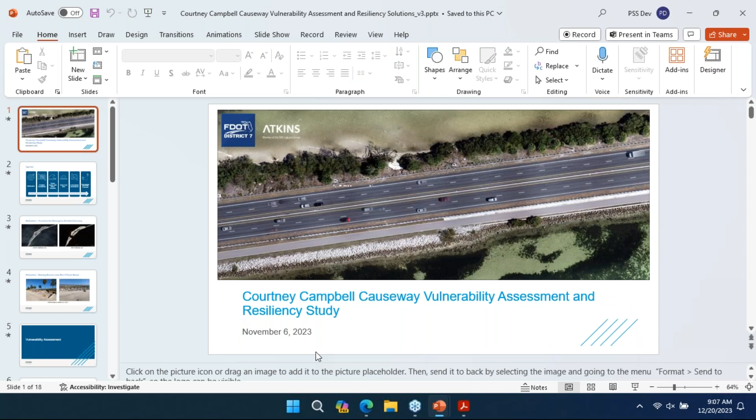Good morning everyone. I'm Mike Salisbury, a coastal engineer with Atkins here on behalf of FDOT to give a presentation on the study we're doing. This is a two-part presentation - I'll go first, then Tara will present after me. We're currently evaluating the existing conditions at Courtney Campbell Causeway and trying to understand how vulnerable it may be to certain storm events, meaning hurricane-type storms or major coastal storms that kick up waves and tides to levels that could possibly damage the causeway and bridges. My presentation will cover the motivation, existing conditions, storm surge and wave hazards the causeway can expect, and wrap up with conceptual alternatives we're considering and a path forward.

First, a little on the motivation. Most of you are probably familiar with Hurricane Ian from last year, which famously impacted the Sanibel Causeway. The picture on the left is the Sanibel Causeway before Hurricane Ian, and on the right is shortly after. You can see the causeway was completely cut through, the bridges and causeways torn apart. That was the only access route for folks living on Sanibel Island, which caused significant angst and problems for local residents.

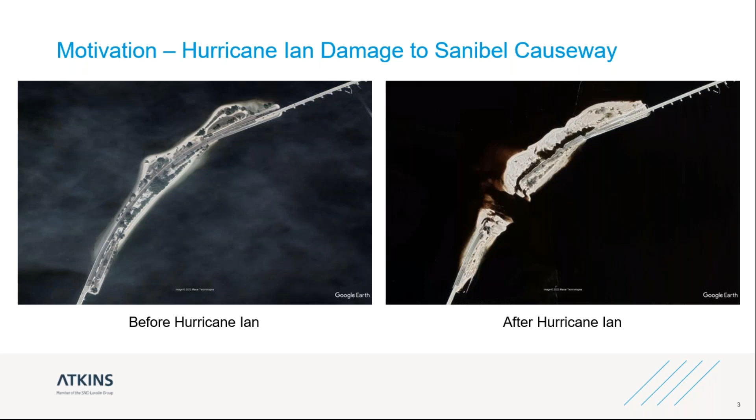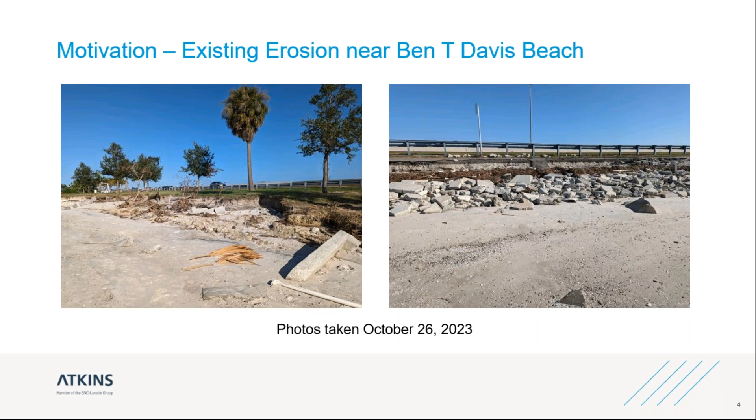So that leads us into trying to understand how vulnerable the causeway is. In order to do that, we did a few different things.

One is we did a field reconnaissance, so we went out there to the site. We took a drone with us, and we did a lot of drone imagery and mapping, took over 3,500 aerial images.

We visited some critical areas. We had to understand for the revetments that are out there, how they're built, how robust, and robustness has a lot to do with how big the rocks are. Think of big waves from storm events—those waves can pick up things and move them pretty easily. So you have to build rocks that are big enough, heavy enough that the waves won't pick them up and move them away when they start crashing into the shoreline.

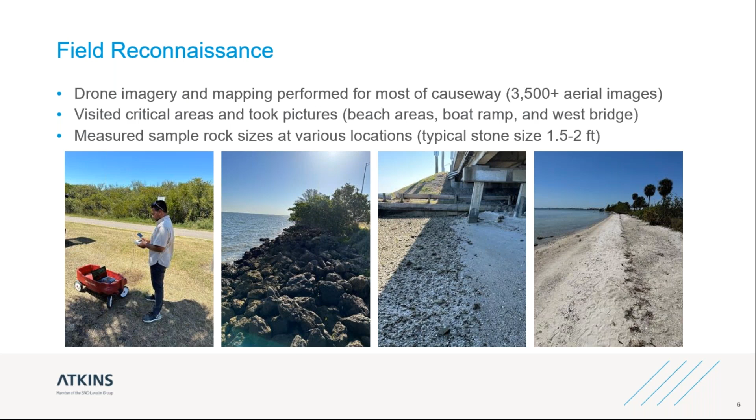So we need to understand what was existing out there. Once we got a handle on existing conditions, we needed to get our arms wrapped around what the potential extreme storm event conditions are that can impact the area—what are anticipated storm surge levels, what are anticipated waves that will be crashing into the shoreline.

There's a few different data sources we can use. The one we've found to be most comprehensive that we can lean on for our current effort is the Army Corps, U.S. Army Corps South Atlantic Coastal Study. Now, that's South Atlantic—it's a little bit of a misnomer since it also stretches to the Florida Gulf Coast, so it covers all the Tampa Bay area. It's a state-of-the-art modeling study they did, looking at thousands of potential storm events that can impact the area, and it was just released to the public in October 2022, so just a year old.

So we took that data and we wanted to understand, as it applies to the causeway, what that looks like in terms of what could impact the bridges. To use this figure on the screen here, I want you to envision that you're out in the middle of Old Tampa Bay in a boat.

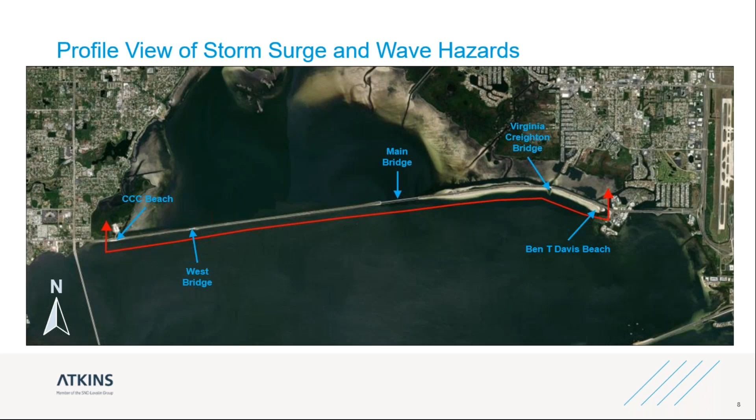You're on the south side of the causeway, looking north. You can see the Pinellas side, Courtney Campbell Beach side is on the left, and Ben T. Davis is all the way to the right. Just imagine you're in a boat looking horizontally towards the north, orienting you a little bit here. What you see here is the profile of the bridge from west to east between the two beaches. The black line is the edge of the roadway elevations as you go along the causeway.

Colors don't show up too well on the screen, but the orange color, in this case, is the 20-year storm surge elevation. When you hear someone say 20-year, 100-year, etc.—a 20-year storm surge has about a 5% chance of occurring in any given year. A 100-year storm would have a 1% chance of occurring in any given year.

So the 20-year storm surge level is right at the edge of the road, edge of the pavement, in a lot of locations. And when you factor in the waves on top of that, the wave crest elevation completely overtops the road. So the causeway becomes very vulnerable in just the 20-year conditions. Anything above and beyond that would just be more problematic.

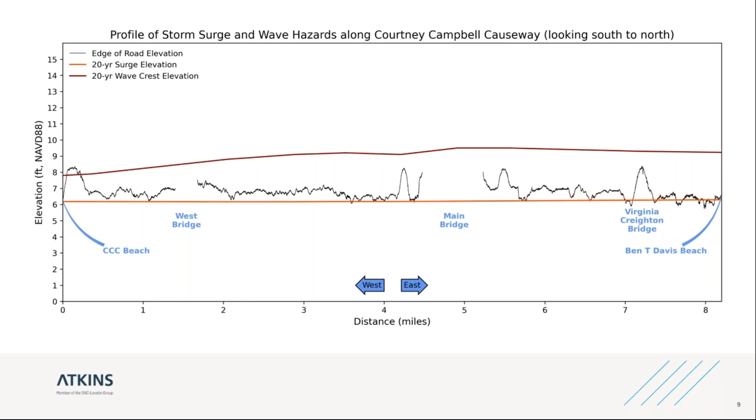So once we understood how vulnerable the bridge is now and into the future, the phase we're in now is starting to look at possible resiliency solutions. We're evaluating anything and everything that can be used along the causeway, from completely green solutions such as vegetative plantings, mangroves, marsh sills, all the way up to completely gray solutions such as stone revetment or seawalls. It really could be anything in between, combinations of green and gray infrastructure.

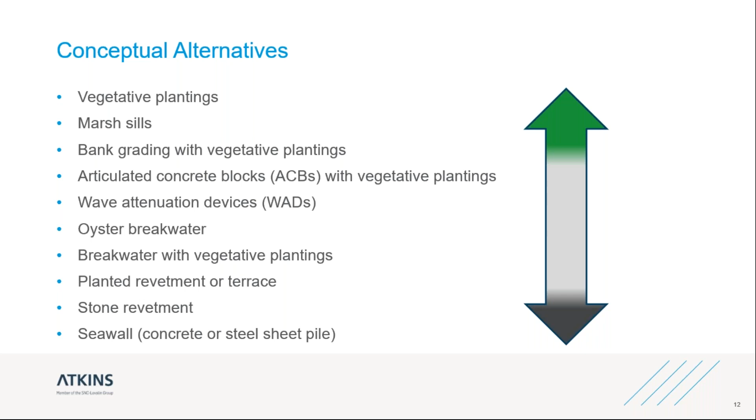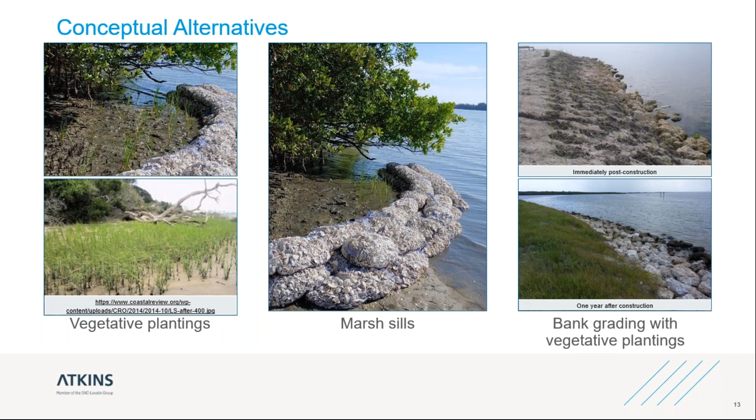Just to give you an example of what that looks like: vegetative plantings on the left, marsh sills in the middle, and bank grading with vegetative plantings on the right. Continuing on through various breakwater and wave attenuation devices, here are some examples of what they could possibly look like.

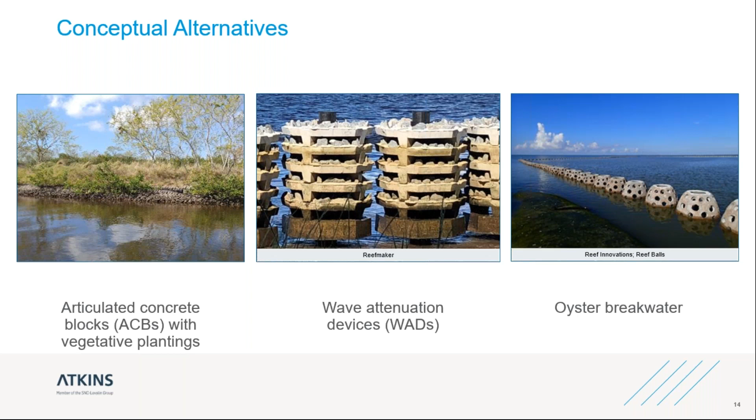And getting into a little bit more of the gray scenarios, with revetments and seawalls, which most people are pretty familiar with.

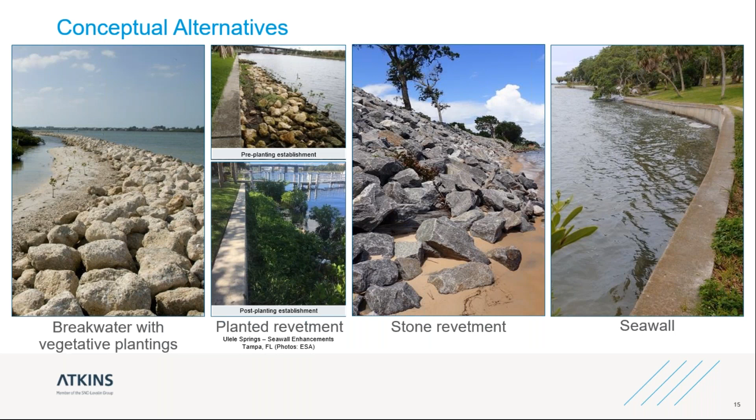So when we evaluate each of these options, we look at how robust they are at holding up to extreme water levels and waves impacting the shoreline, how easy it is to permit, how beneficial it is to the environment, and local conditions such as bathymetry and soil. It's a whole matrix where we evaluate pros and cons, and eventually we'll identify what we think is the ideal solution for the causeway.

More than likely, based on what we see, it's probably going to be a combination of solutions. In one area, one solution makes the most sense. The causeway is about 9 miles long, give or take, so moving to a different location, given local conditions, maybe a different solution makes sense. So we'll probably end up with a hybrid of scenarios.

Once we understand what each of those solutions are, the plan is to present to FDOT leadership for consideration and discussion on moving forward.

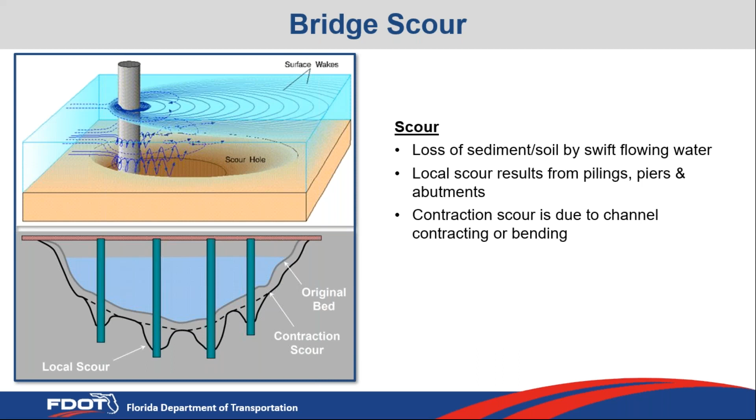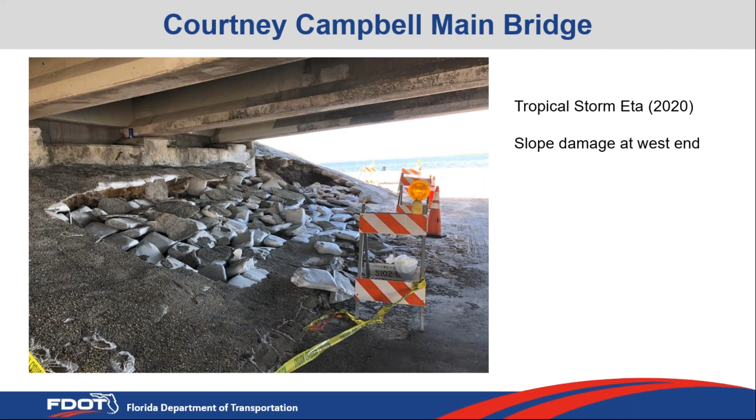This was an old design we had for slope protection: basically you have your dirt, your soil, then concrete riprap bags, and a concrete slurry on top. But once you lose one bag, once you have a hole, it's like an hourglass where it all just comes out. Luckily it wasn't major catastrophic damage, but this tropical storm told us we need to start taking action now. Here's another example, and you can see we're already seeing some of the actual structure that's supposed to be buried.

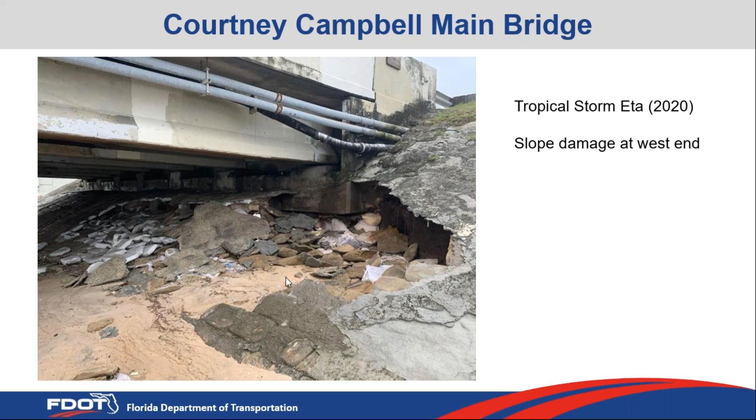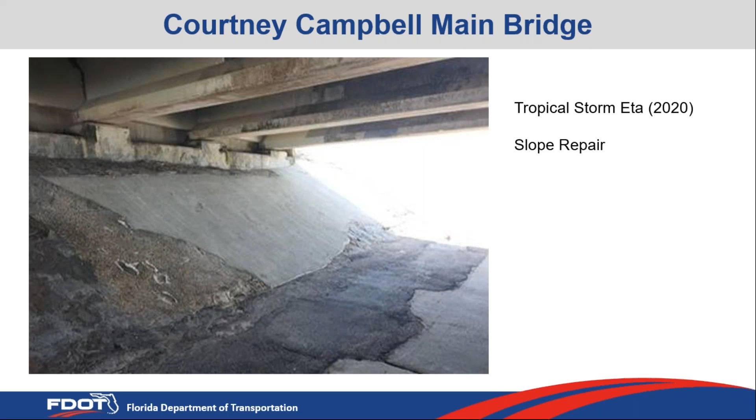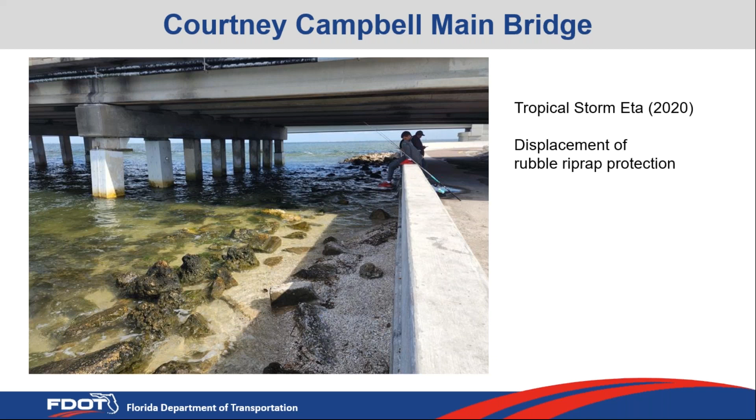Also from Tropical Storm Eta in 2020, you have very large riprap and bedding stone, and the water forces can literally pick up these stones. In the past storm we just had, 90-pound boulders were picked up and moved to shore. So we definitely realized that we need to strengthen our bridge structures.

So the project that just was let, the goal is for construction to be completed before the peak of hurricane season this coming year.

What we're doing, I know it's a lot of details, is strengthening our slopes down to putting a geotextile fabric. We're going to have larger stones, larger bedding stones, and riprap bags on top of it. We are building all of the slopes around the Courtney Campbell Bridge.

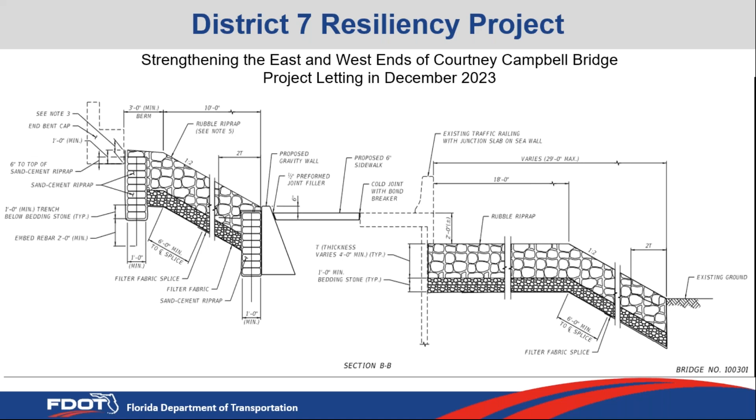I can get into the details if we have any structural engineers in the room, but all in all, we are rebuilding and strengthening up to a point where we're starting to bury, installing rebar to make sure the concrete bags don't move. We are going above and beyond to make sure the Courtney Campbell Bridge is secure.

As part of our study and strengthening, the new Howard Frankland Bridge is also being constructed. So they reached out to us in the maintenance office, hearing that we're working with Atkins and some of our partners and looking at making our structures more resilient.

From the Sanibel Causeway catastrophic event, if you will, we realized that for the new Howard Frankland Bridge, we will need to fine tune some of our designs for strengthening the approaches. Luckily, since we're still in construction, we were able to get in there and start updating our designs to make sure we don't have anything near what happened at Sanibel.

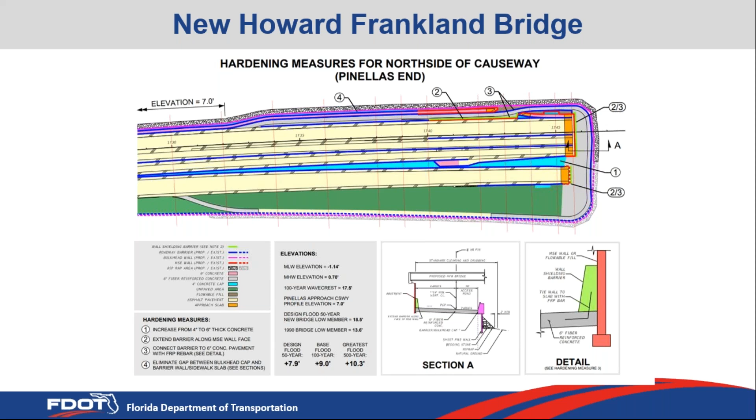So what are we doing at the Howard Frankland Bridge? Instead of just installing concrete slabs, we are starting to use standard and fiber reinforced concrete, and we're adding structural steel to our concrete.

New larger riprap bags that we're actually getting imported from Georgia - or rather, rubble riprap and bedding stone, very, very large, very heavy stones - that we're going to be putting in front of our seawalls and our shores.

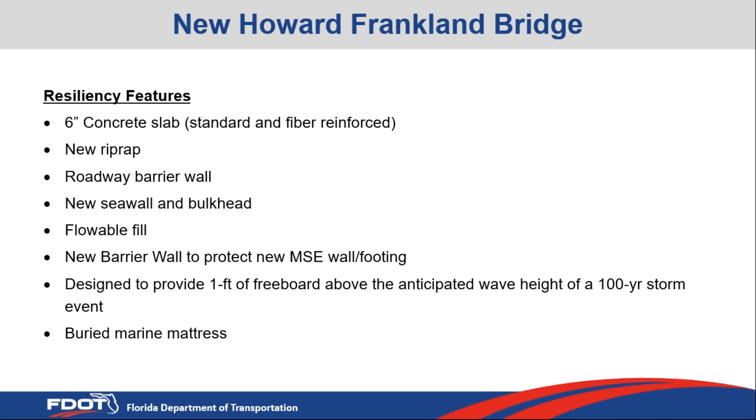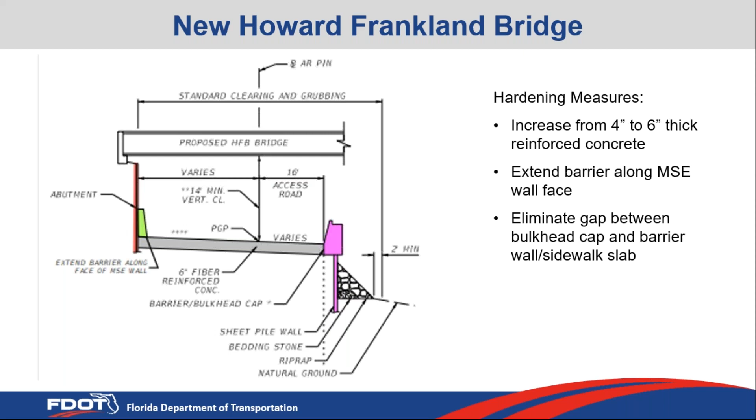Let me show you some details that we have. Underneath the Howard Frankland Bridge, just like Courtney Campbell, there is a pathway underneath, a turnaround point, and also some fishermen use those areas as well. So we are going to be strengthening all those areas with additional steel, additional bedding stone, and rubble riprap.

We also found that anytime from Sanibel, anytime you have a concrete member, a concrete barrier next to a wall, anytime you have a seam or an opening, that's an avenue for water to get in. Which makes sense - anytime water gets between two joints, any sand or silt underneath is going to start consolidating and getting washed out. So we are sealing all of our joints, making sure there's no access for water to get in around any of our walls or barriers around the new Howard Frankland Bridge.

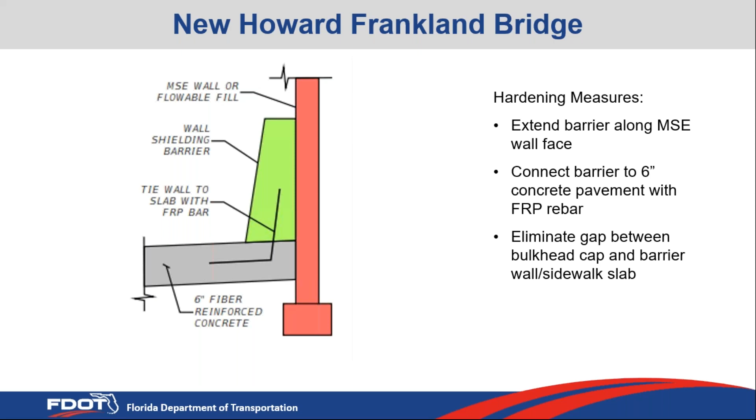This is Hurricane Idalia 2023. Jumping back to the Courtney Campbell Bridge, you can see how high the water level is. Our typical fender system, about 6-8 feet above the water, was completely engulfed, and the planks sitting on top of the fender just popped off like keys on a keyboard. That also showed us that we are vulnerable with fender systems, which are there to provide a visual guide for boaters and mariners, and also to protect our structure when boats are coming through.

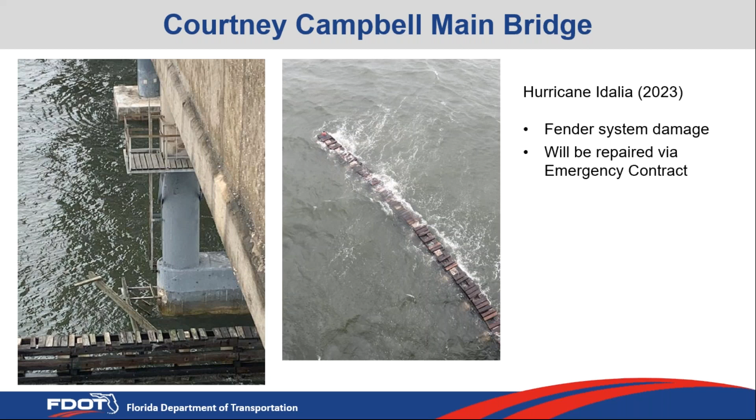Over to the east of the Courtney Campbell Main Bridge, there is a smaller bridge that was designed and installed in 2019. It's a very low-level bridge that was cut through the roadway and installed to provide additional water quality measures and increase water quality in that area.

Because it is a low-level bridge, the second we have a storm event or a high tide, the water level goes up and over the barriers, up and over the seawall. You may have noticed that anytime we have a major hurricane storm event, Courtney Campbell is usually the first one that gets closed, and that is not due to a structural concern - it's because the water levels are so high. There's a lot of vegetation, there's a lot of waves.

So we close the bridge just for safety. We already set up crews to come out there and start cleaning out, make sure it's safe before we open it to traffic. But Courtney Campbell is our most vulnerable bridge, our most vulnerable causeway, so that is why we're going after it now and making sure that we're strengthening it.

And because of that, we have had extensive damage. Also just this past weekend, the damage has increased even further to now where it has some erosion at that area. We've had some rotated walls. So they're actually going out within the next couple of days and they're going to be restoring this section, just to make sure no future storm events can jeopardize our bridges and the causeway.

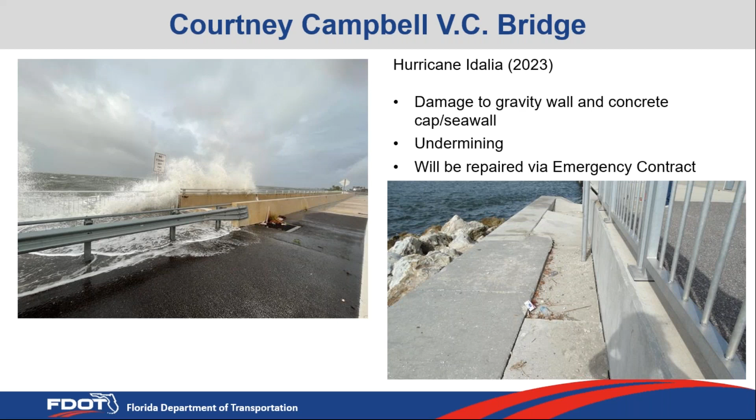Yeah, Kevin? The only thing I'll say is, when we had our parking master plan presentation, I know they're in phase one, but one of the topics they're discussing is parking management districts, where the funds collected from parking stay within that district. One of the ideas that came up internally was that Courtney Campbell and Ben T. Davis is a perfect attempt, not a capstone, but kind of a snapshot of how you would apply that to the entire city by using that district.

It's a very unique parking environment, mostly recreation driven and it mostly swells on weekends. So having even just a minor increase in parking rate will hopefully make the city some money on the lot. More importantly, just matching what Clearwater is paying will hopefully create a pot of money the city can apply towards other things regarding restoration as well as beach management, because, to your point, there will be an uproar if the beach does go away.

Of course, nature may make that decision for us. Time will tell. But our ability to properly fund this community asset means it can be preserved or at least maintained, so we're not having these resiliency studies and this question answered for us, when we know we have a dedicated source of revenue going toward it. So that might be something the city of Tampa, with parking and mobility and Parks and Rec, can collaborate on, as well as with TPD.

And of course, the Alliance is ready and willing to help with that. The Courtney Campbell Causeway also has a great group of advocates. So I'm just throwing it out there, maybe that's the way we can finally try this idea in Tampa, have those funds stay within the Courtney Campbell area and use that to preserve the beach. I think you'll find a lot of positive reception to that. People really want that parking money to go toward road improvement, just saying.

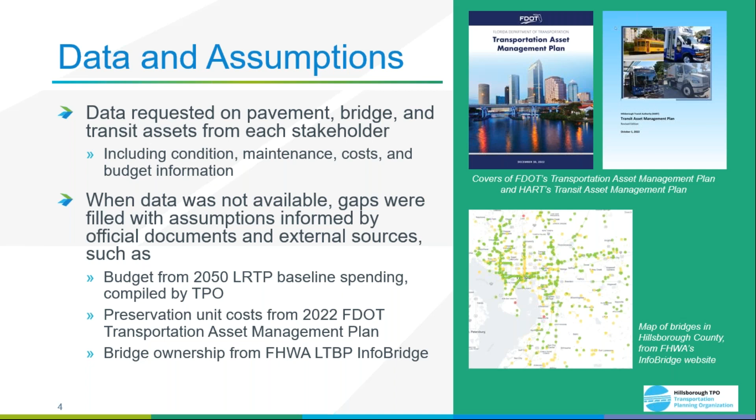In the next few slides, I'll be presenting the results from the needs assessment. For each needs assessment by asset type, we considered two spending levels: the trend spending level, and then the performance spending level.

For the trend spending level, we estimated the impact to the condition of the infrastructure if the existing spending level continued all the way to 2050. Whereas for the performance spending level, we estimated what additional funding is needed to reach state of good repair.

So for the pavement assets, the current funding spent for pavement preservation is 136.2 million. This funding level results in about 28% of the roads achieving the goal to be resurfaced every 12 to 20 years, depending on the target or goal of each of the agencies in the region.

We also found that the funding shortfall varies significantly across the stakeholders. The additional funding to close the gap was 86.9 million per year. This would result in all of the roads being resurfaced within the target resurfacing cycle for each of the agencies, and on average, a typical road would be resurfaced once every 18 years.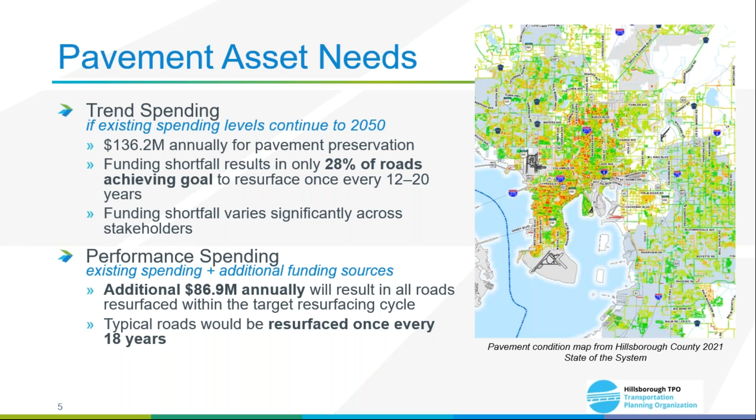For bridges, we found that the current total funding for bridge preservation in the region is 19 million per year. This funding level results in about 72% of the bridges achieving the goal of being rehabilitated in around 40 years. This funding shortfall varies significantly across the stakeholders.

FDOT doesn't have this issue, whereas others like Hillsborough County have a much larger gap. For the performance spending level, we estimated that an additional 7.4 million per year are needed to achieve the goal of having these bridges preserved under the preservation cycle.

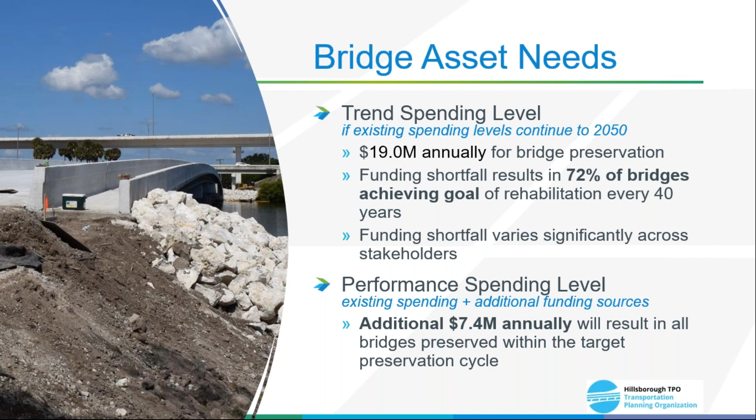For the transit asset analysis, we consider the two most expensive assets to maintain, which are the buses and the buildings. Something that should be noted here for the bus fleet assessment is that HART has been operating at a scaled back service; for instance, the bus fleet is...

32% smaller compared to the 2019 needs assessment. So for buses, the current spending level is 12 million annually for bus replacement, and we found that this funding level is sufficient to keep the current bus fleet of 132 buses at an age less than 10 years, which is the benchmark recommended by the Federal Transit Administration.

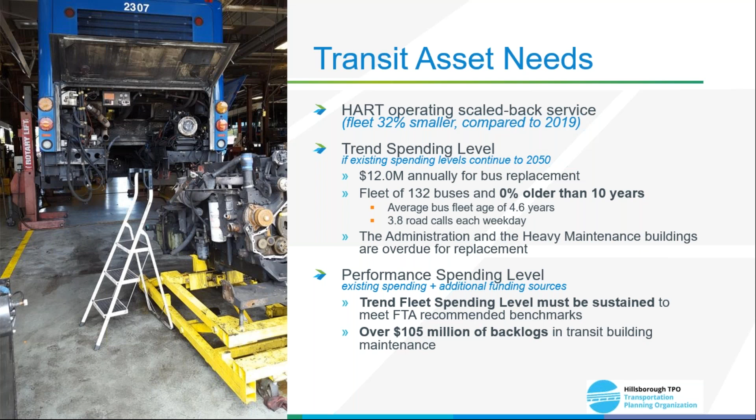We also found that some buildings, such as administration and heavy maintenance buildings, are overdue for replacement. For the performance spending level, the main conclusion was that the trend fleet spending level must be sustained to meet FTA recommended benchmarks, and there are over 105 million in backlogs in transit building maintenance.

Next, we performed a needs assessment for resilience investments. For this, we focused on two resilience improvement categories: stormwater resilience improvements and road resilience improvements, including hardening pavement and sub-base, raising the profile of roads, and shoreline preservation. The data used for this came from the Resilient Tampa Bay study.

The Resilient Tampa Bay study was conducted in 2020. As part of that study, there were 71 miles identified as critical for mobility in the region and moderately to highly vulnerable to extreme weather.

So for the trend spending level, the current budget allocated to stormwater improvements, regardless of whether they're resiliency or non-resiliency improvements, the total funding right now is 1.6 million per year. And for road maintenance it's 82.3 million per year, again regardless of whether they are resulting in resiliency.

So then we estimated the funding needed to treat these 71 miles of critical roads that are moderately to highly vulnerable, and the funding for treating them for stormwater resilience improvement is an additional 14.8 million per year, which is much greater than the entire budget allocated currently for stormwater improvements.

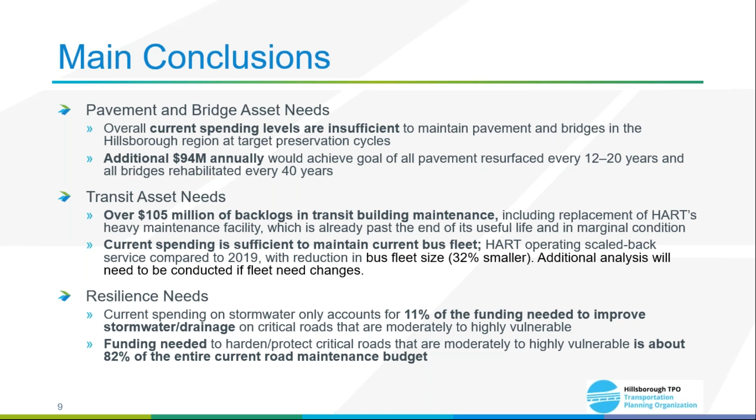That was the last slide of my presentation today, where Connor or I will be happy to address any questions you have.

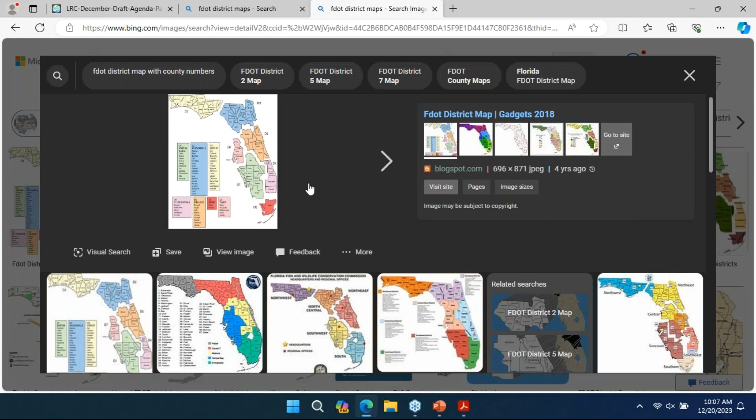So Miami is District 6. Then, so north is Tampa Bay, like this around us, District 7. Naples and all that is 1. District 1 is, you think Manatee County, south of Hillsborough, all the way down to Alligator Alley, which is Lee County, and then the middle part of the state. Because then along the east coast is District 4 and District 6. We can show them that. So East Coast, District 4 is just north of Miami. Correct, that's like, and Fort Lauderdale. District 3 is like Orlando? No, District 3 is the Panhandle. Oh, District 3 is rural, it's Chipley. And 5 is like Orlando? Yeah, I think 5 is Orlando.

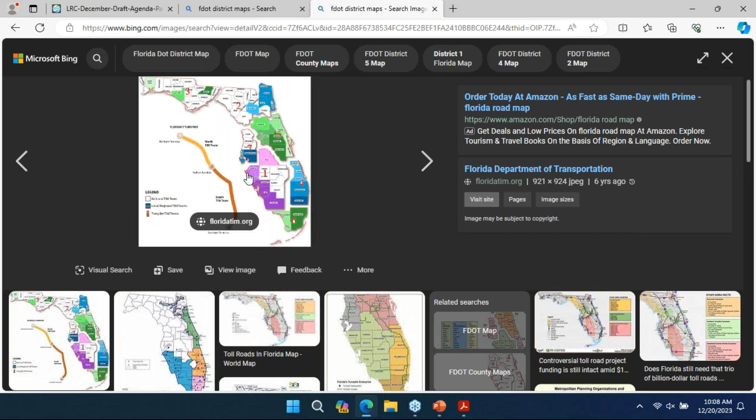The big comparisons would be District 5, District 6, District 4, and 7, because those have kind of the major metropolitan areas within the state.

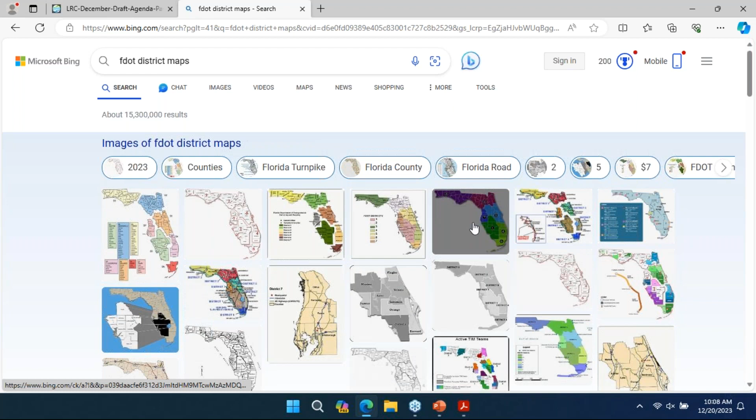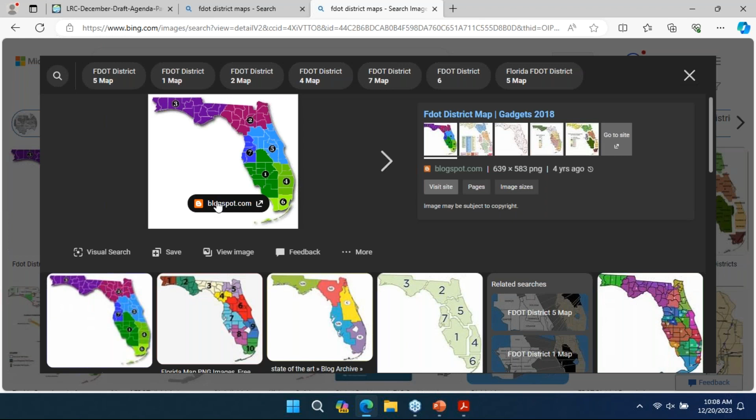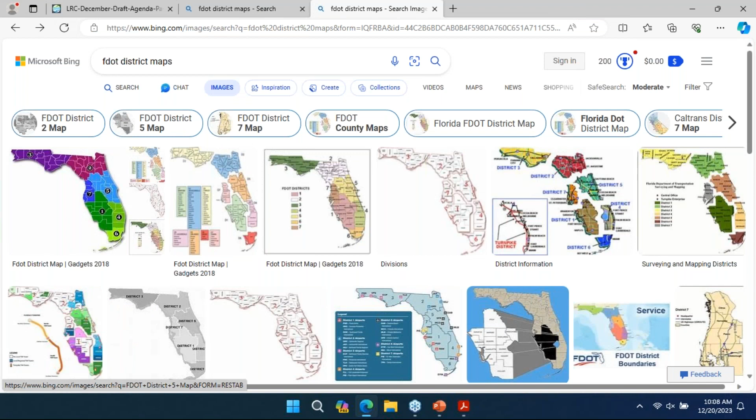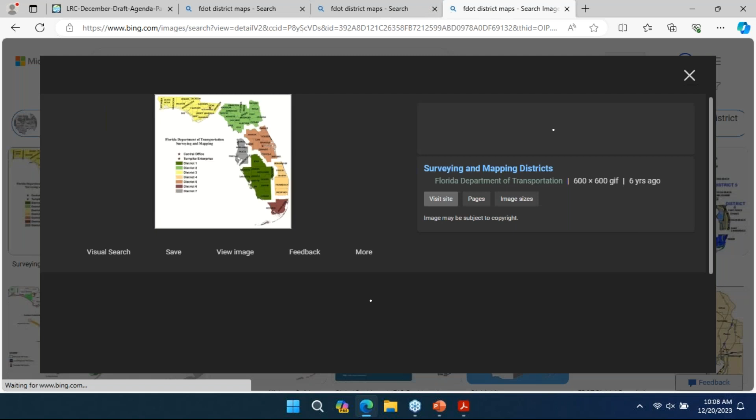And then there's an average at the very end, so you can see on average what is across all districts, what the district is spending on.

I get it, Kevin. This is great, Kevin. Thank you. Yeah, this is really awesome. Thank you so much. And scary.

Well, I think I remember our conversation, a lot of this was kind of more comparable to figure out, and it's not apples to apples even within the categories, because a rail project is mostly freight, and of course this also doesn't cover federal funds. So if there's some sort of federal match or a federal project getting a large contribution, that's another piece of the puzzle. But from a district perspective, this is how the district measures their budgets across all 7, and this is how the district measures who gets what.

And of course there's also some given, like for example District 7, we have the Westshore Interchange Project and the Howard Frankland Bridge. We have obviously more funding in the state highway system than say Miami, where they only have the 395 interchange. So depending on what big projects we have in the hopper, it does affect the percentages as well. And I think that's important context. It doesn't mean that they're funding transit less, it just means we have a really big asset that's getting a really big uptake.

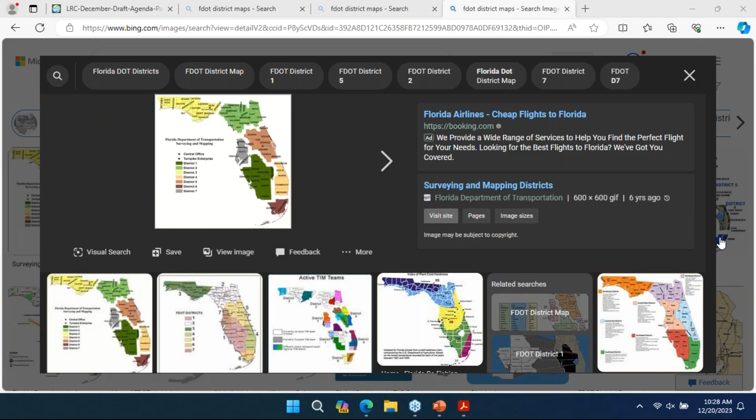Hi everyone, just wanted to share the FDOT Florida Pedestrian and Bicycle Focus Initiative priority county map. It's a look at the districts and those priority counties listed as far as bike-ped safety. So as a side note, if there's any interest in where they're putting emphasis on ped-bike safety, it'll show on this map, and it's at the link at the bottom of the page. I thought that was helpful since it breaks out the districts the way you all did as well. I pulled it up online to share. Thank you, Jason.

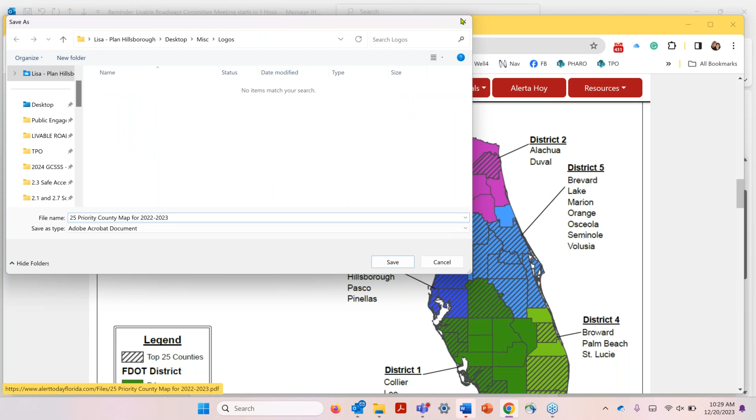Okay, any other new business? Yes, I do. Okay, all right, you ready?